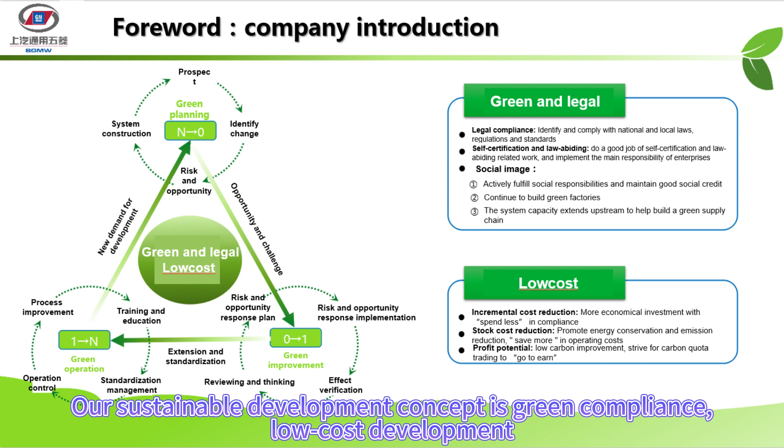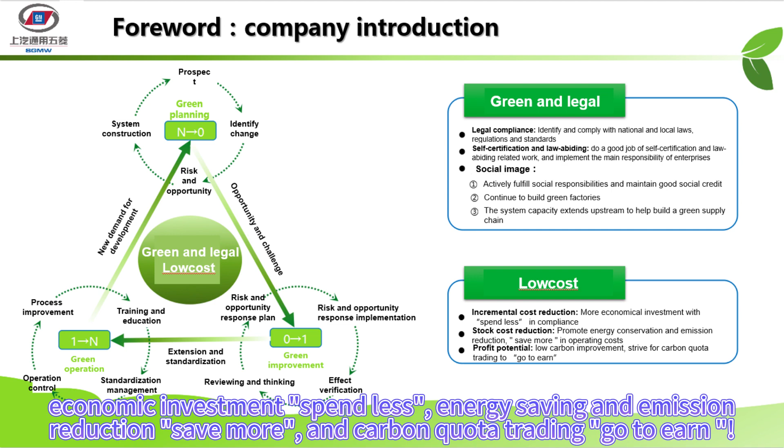Our sustainable development concept is green compliance, low-cost development, the implementation of corporate responsibility based on laws and regulations. Economic investment spend less, energy saving and emission reduction save more, and carbon quota trading go to earn.

Internationally, in 1992, countries around the world reached a consensus and unanimously adopted the United Nations Framework Convention on Climate Change, which has been continuously improved and supplemented in keeping with the times.

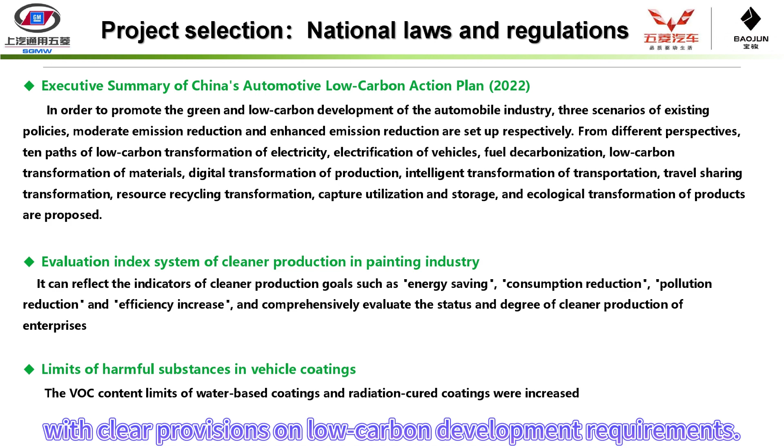China's laws and regulations have also put forward green, low-carbon, and sustainable development routes in various forms, with clear provisions on low-carbon development requirements.

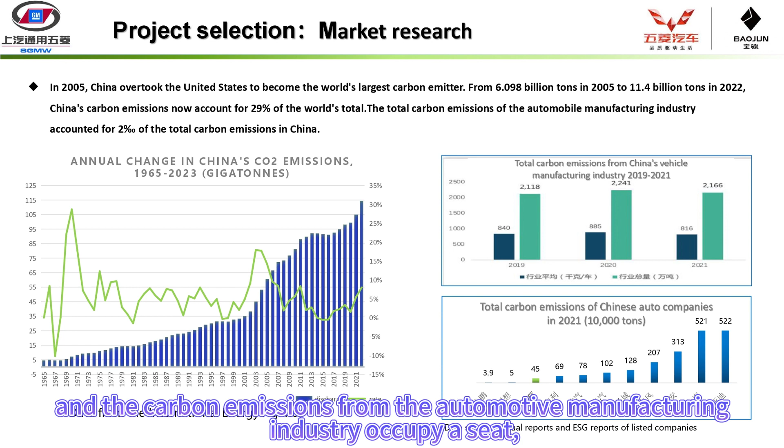It is important to know that in 2005, China surpassed the United States to become the world's largest carbon emitter, and the carbon emissions from the automotive manufacturing industry occupy a significant share, one of the main sources of which is the VOC emissions and treatment during the coating process.

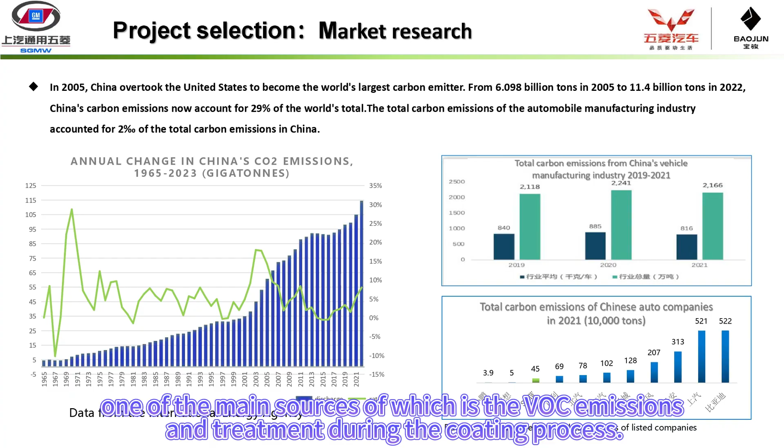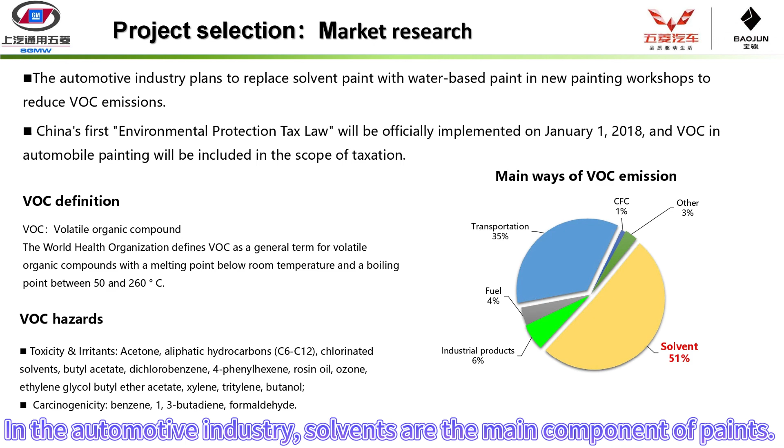What are VOCs? VOCs are volatile organic compounds, and the main way they are produced is through the use of solvents. In the automotive industry, solvents are the main component of paint.

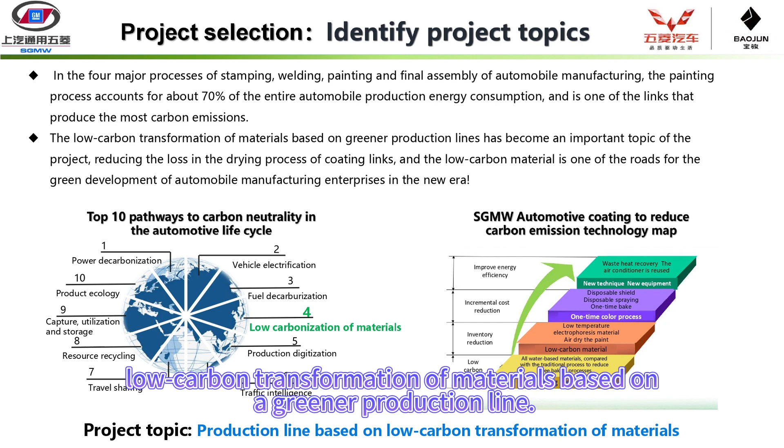Therefore, our topic focuses on the application of low-carbon transformation of materials based on a greener production line.

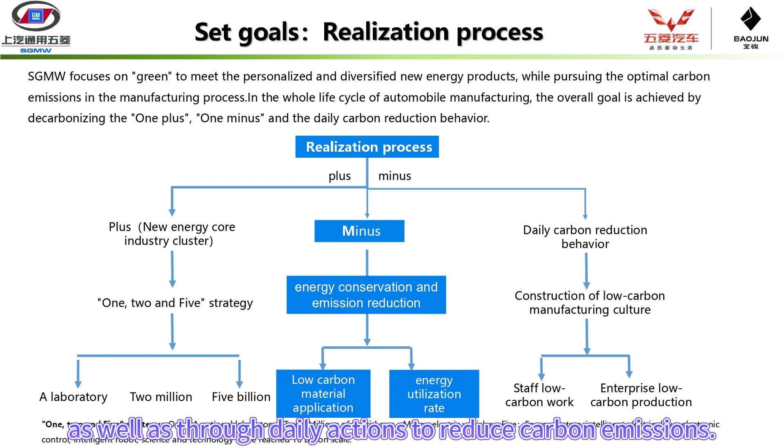What is our path of exploration? The overall goal is to be achieved through the 1 plus 1 minus of decarbonization and energy enhancement, as well as through daily actions to reduce carbon emissions, to accelerate the achievement of the goal of double carbon, to build an international leading new energy core industry cluster through the 1, 2, and 5 strategy.

To construct a carbon emission accounting system for the whole life cycle of vehicle manufacturing, to link upstream and downstream to reduce carbon, and to help China's automobile industry develop a new pattern.

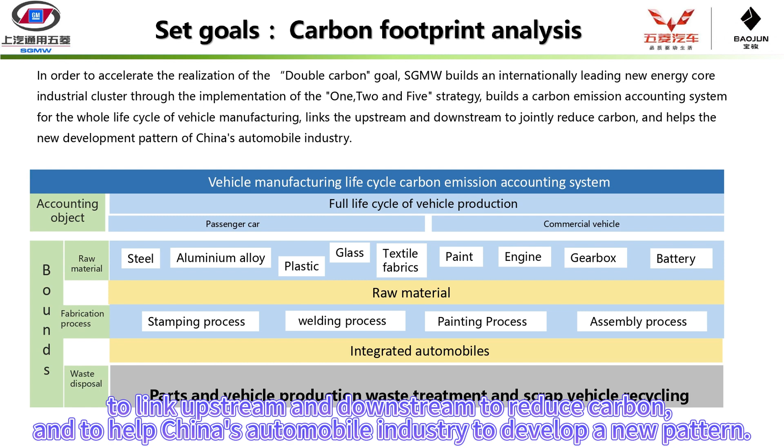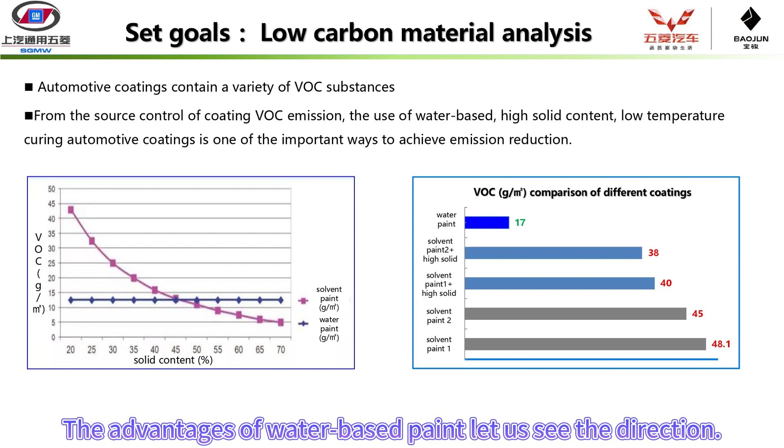Carbon emissions in the automotive manufacturing industry are mainly concentrated in the painting process. Automotive paints contain a variety of VOC components. So how can they be controlled at the source? The advantages of water-based paint let us see the direction.

At the same time, we can upgrade the equipment, significantly improving the coating production manufacturing process of energy utilization, reducing manufacturing costs, and carbon emissions.

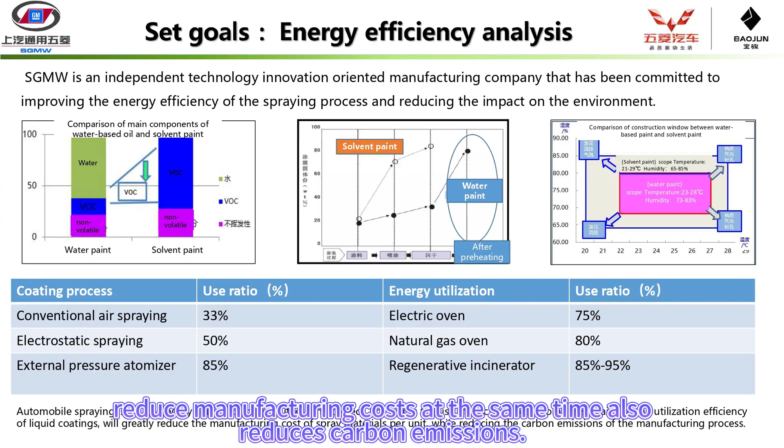We are no longer bound by the limitations of the traditional process. Through the compact water-based process, we can reduce the middle coating baking, middle coating flash dry oven, and other processes, improving the comprehensive utilization rate.

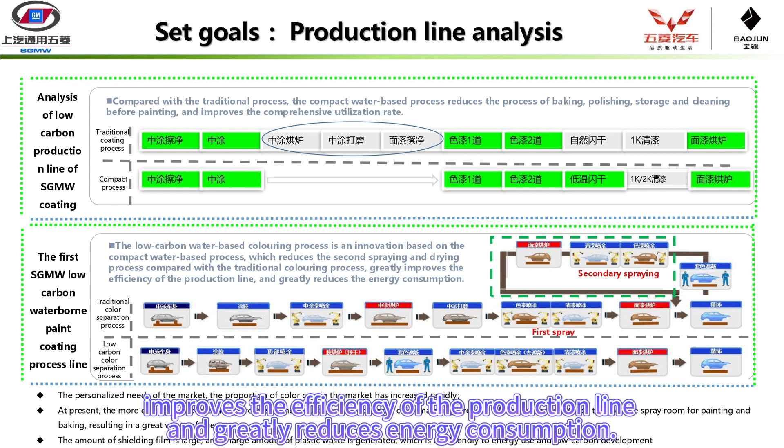On this basis, we have developed a low-carbon water-based color separation process, which reduces the secondary spraying and baking process, improves the efficiency of the production line, and greatly reduces energy consumption.

In summary, we have established the following objectives: the construction of all water-based green production lines, the first low-carbon water-based color separation process system, and ultimately achieve a reduction of carbon emissions of 30,000 tons a year. Carbon emissions decreased by 35%.

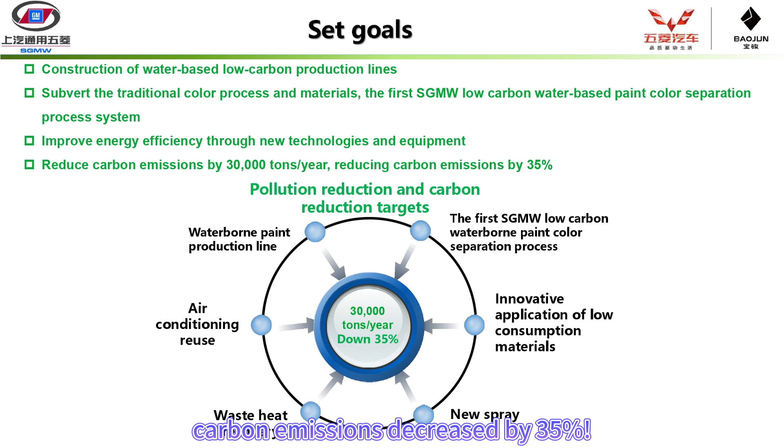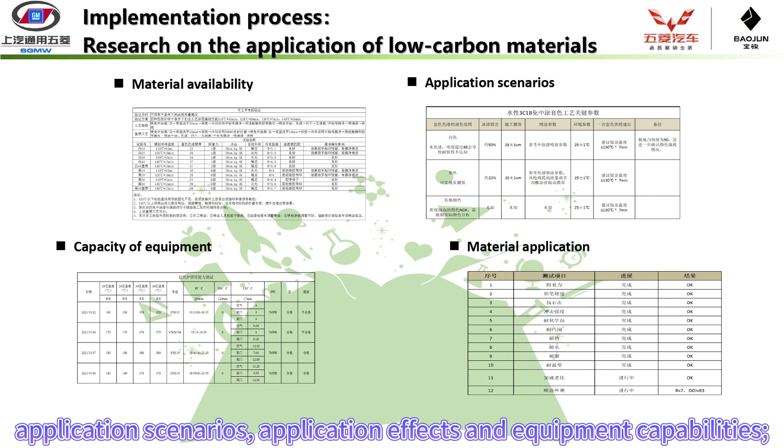To this end, we have established a 5-year long-term plan, during which we are conducting research on the adaptability of low-carbon materials, application scenarios, application effects, and equipment capabilities.

According to the process characteristics of low-carbon materials, design and complete the green production lines of the new construction, alteration, and other work to achieve the commissioning and operation.

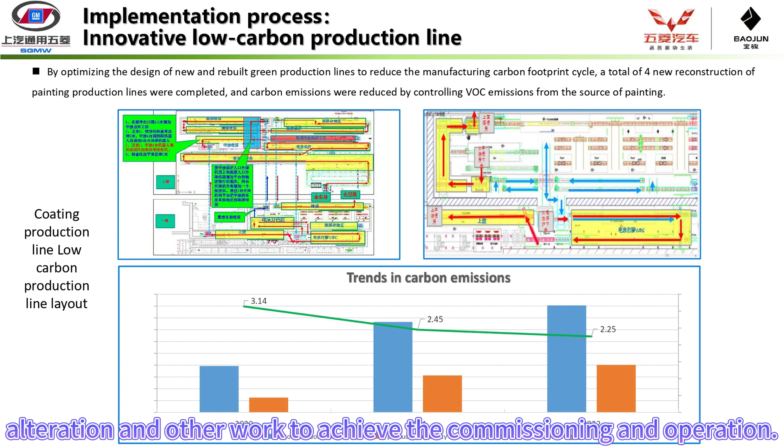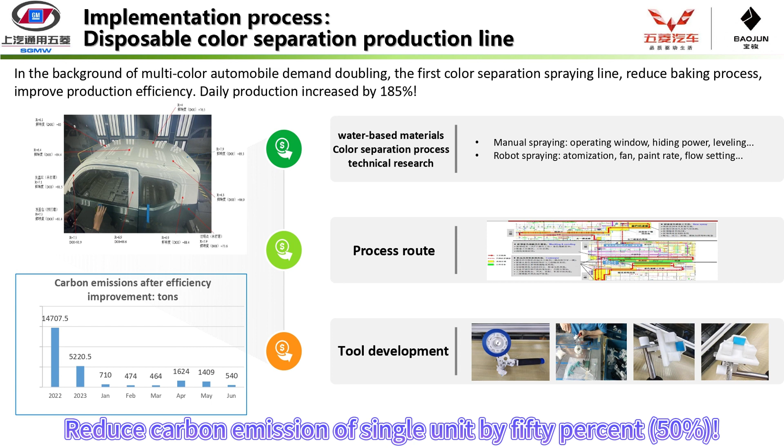On this basis, the first one-time color coating line was created, realizing the daily output of color coating cars increased by 185%, and reduced carbon emission of a single unit by 50%.

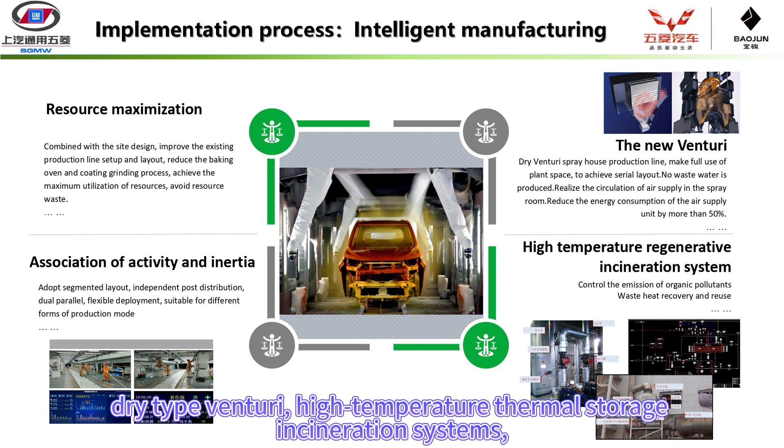During the process, we have incorporated a variety of new equipment and processes: dry type venturi, high temperature thermal storage incineration system, dynamic and static flexible layout, etc. At the same time, the introduction of an intelligent energy management system, systematic analysis of the distribution of energy consumption, precision management, timely control, and improved energy utilization.

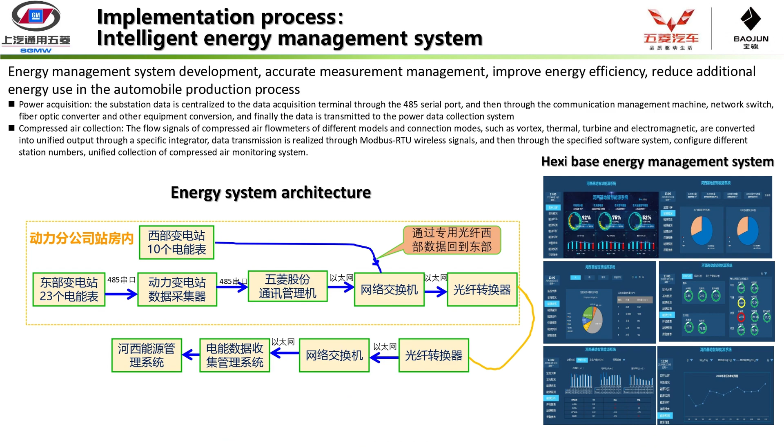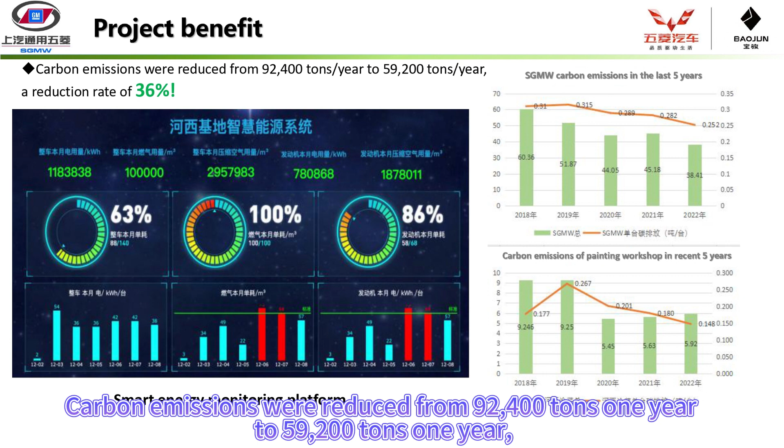Through the construction and commissioning of the green production line, we have achieved a reduction in carbon emissions of about 33,267 tons a year, which is mainly contributed by gas and electricity. Carbon emissions were reduced from 92,400 tons a year to 59,200 tons a year, a decrease of 36%.

At present, the green production line and low-carbon color separation process have been popularized by our 4 production bases, realizing more than 6 million units of production.